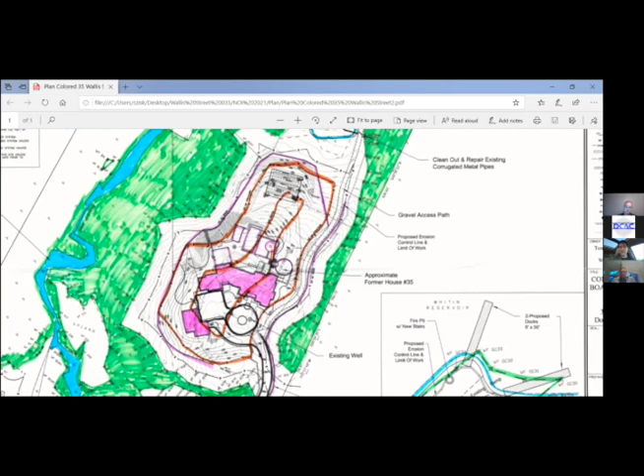In addition to the redevelopment of the house site, if you could scan the plan north toward the reservoir, there's an existing path that goes down to the water's edge where there's historically been docks. An RDA was submitted about a year ago to put in a new dock, and that was granted a negative determination of applicability along with some tree removal.

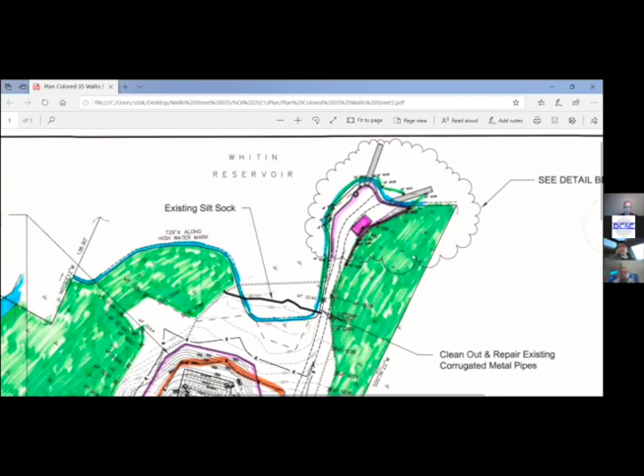The tree removal has taken place, but the docks proposed here are slightly different than what was proposed in the RDA. So we're showing those as part of this notice of intent, though in substance the commission has already dealt with this issue. We're now proposing 2 docks in slightly different locations. In addition, shown in pink is a proposed boathouse that would be installed on pilings for the storage of water-dependent equipment, elevated above the ground.

Right next to that, in that zoomed-in picture, we show this for construction purposes, though it would not be sitting on the ground and therefore not directly fill any wetlands. This plan shows 65 square feet of BVW alteration to allow upland pedestrian walking around the boathouse, with 165 square feet of wetland replication out on this peninsula, which is largely used for ingress and egress from the reservoir for recreational purposes.

So that's a broad view introduction to the project. I think we can open it up for discussion. Art Allen isn't on the call, but he's scheduled to do a site walk with us on Friday. Mark Allen, the civil design engineer, is on the call, as well as the company who would be responsible for the dock installations.

Okay, thank you very much. Steve, did you want to start? Yeah, so it's good to know, some of my concerns were whether there's any additional clearing on the property. So that's good to know, especially where the detached garage is going up in that area. That's going in an area that's already been cleared.

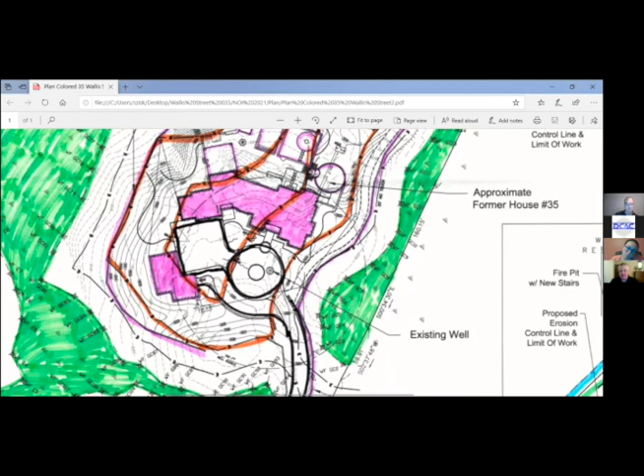So basically what we did was, in working with the architect and the landscape architect on the project, we didn't want to add any additional fill to the property. We basically used the existing elevations that were there in the past and mirrored exactly the elevations that were there before. So we're not trying to bring in any additional fill for the project by any means.

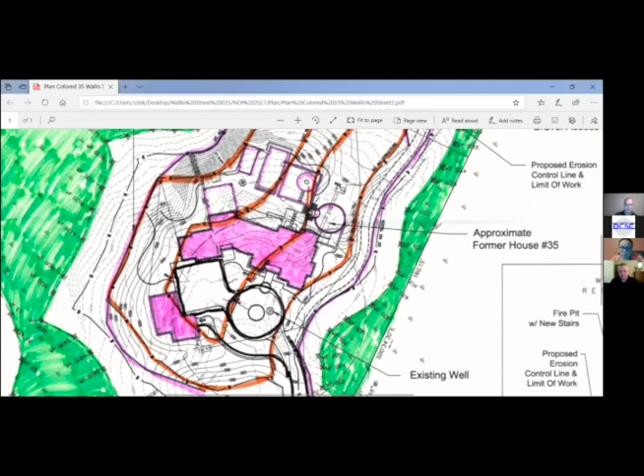So the architect is comfortable with leaving the elevations where they were for the house and the foundation. And then as you can see, the patio sort of drops off from that area, and the septic system sort of drops off from that area too. It's all going to be a natural grade transition from the house down to the reservoir.

And then this existing path that they cleared with the RDA, that's not being disturbed at all? Correct. Yeah, the path that they have there today is the path that they intend to use.

And so the only comment I had really is because you called out this culvert, and it's a little ambiguous. It says clean out and repair existing corrugated metal pipes. I'm not too sure what that means by repair. Are you ripping them up and replacing?

No, I apologize, we may have been too brief on that explanation on the plan view, and we can be a little more elaborate on the plan revision. Basically we just want to be able to clean out the culverts if they get dirty. We intend to leave the ones that are there now. We're not anticipating any additional flow, but as you know, over the course of time with leaves and debris, things get clogged. Tony and Denise just want the ability to go in there and clean out those existing culverts. No remove and replace right now, just basically routine maintenance in the future.

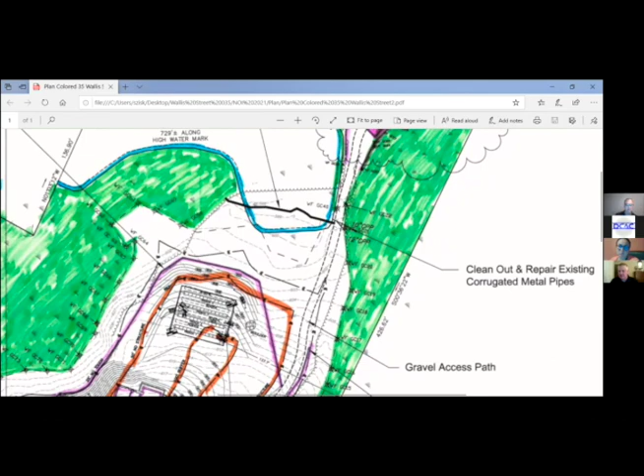Oh, that's good, yeah, it was the word repair that kind of threw me off. Gotcha, remove that word if you're not actually doing any repairing, just clean that out. And I guess that's my fault too, because with our Uxbridge store we have a river or a brook right behind it, and we have to clean that out to maintain how it flows underneath Route 16. And if you don't put the word repair in there, we get in trouble. So I thought I was being right.

Some of the other issues, I know you've got wetlands planned around here, and maybe, Mark, it's a little steep. And then everything flowing during construction, it can be a mud pit. It might be a mud pit for a period of time.

That may be something a little bit more — some BMPs, I don't know, silt fence and traditional hay bales — not for the entire area, but the areas that are prone to a little more silt and runoff heading through them. Yeah, absolutely, I agree with that, Steve.

We can definitely do that in the area of the slope just off the patio area. Yeah, in that area there, that probably has the highest chance of erosion during construction, as well as the septic system area. So yeah, I think we can bump that up and beef up the BMPs in those areas.

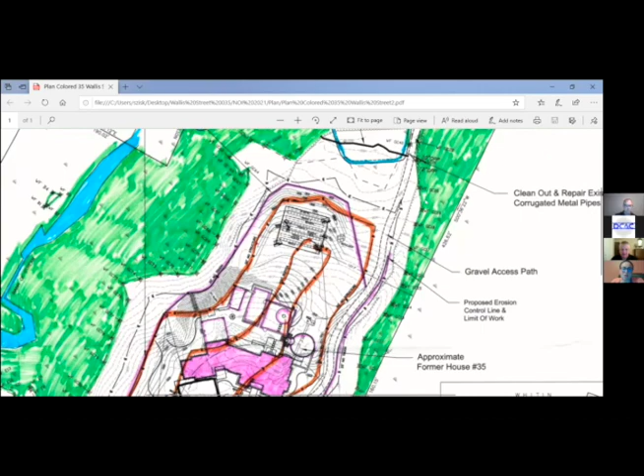It would almost be against the silt fence because it's making more disturbance within very close proximity. So either a double row or the straw bales. Yep, I don't know, absolutely. Toe it in, because everybody's saying it's creating more disturbance — you're right at the 25.

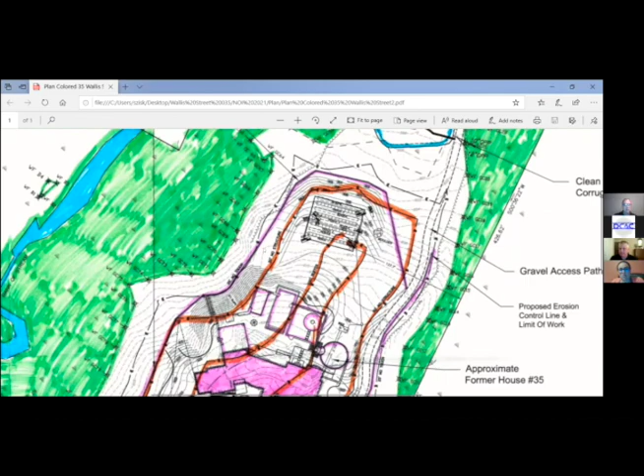What do you see, Steve? Well, I think this is part of the existing lawn, not disturbing it, just really during construction. It's not going to take much for this to channel down into the wetlands or into the pond itself. If this whole area is constructed at one time, all it takes is a heavy rainstorm, and it's such a slopey hill.

So I think what's proposed, and no fault of theirs, is just traditionally that little fiber log, the 12-inch compost sock, but even a double row or straw bales to double it up, versus using a ditch witch right on the 25 on both sides. And then there's even more chance by toeing it in. I don't know what I've been seeing. So if Mark takes a look at it, if you can suggest something that's a little more advantageous for security for the silt.

Absolutely. And then down here at the...

Well, there's two things with the docks. I'll work with the docks first. The concern, and I think DEP might have had a comment on this, is I don't think it's a great pond, but it's the issue that a lot of people would like, well, Manchaug Pond, they have to get Chapter 91 licenses and stuff. I don't think that's the case. There might have been a determination, but it's the length of the pond, especially the dock, that I don't know. We really haven't come into a situation where we've had 30-foot docks that project out into the lake. I don't know whose jurisdiction that would be, but that'd be something you might want to look at.

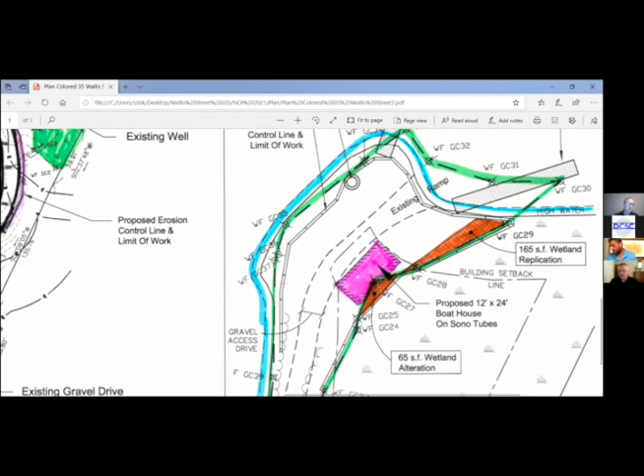Okay, and then the boathouse. It's an unusual situation, we haven't come across this too often. There wasn't really much detail exactly. I know you're on sonotubes, but 12 by 24, is it going to be like a canopy type? Is it enclosed? Is it going to be like a glorified shed where people hang out, what's the purpose of what's going to be inside of it?

Yep, absolutely. And apologies for the short explanation on the plan, but like Scott mentioned earlier in the narrative, it's going to basically just house the water activities, their life jackets, their boat equipment, and it's not meant to be anything that has plumbing. It's going to be sitting on helical piles, not sonotubes actually. That's one of our changes to the plans. Heliopiles are a little bit less invasive to the ground. They're a steel cylinder that corkscrews down into the earth just a couple of feet, and then the structure sits on top of those heliopiles.

So we initially spec'd out sonotubes, which have a little bit more earthwork with the digging, excavation, and concrete. But we're actually going to put them on heliopiles instead. It'll be a wood structure. It'll have a roof over it, doors on it, a lock on it. And it's mainly for storage of boating equipment.

So no fuel or anything? I'd have to ask Tony and Denise that. No. No fuel. I have a quick question. So no fuel.

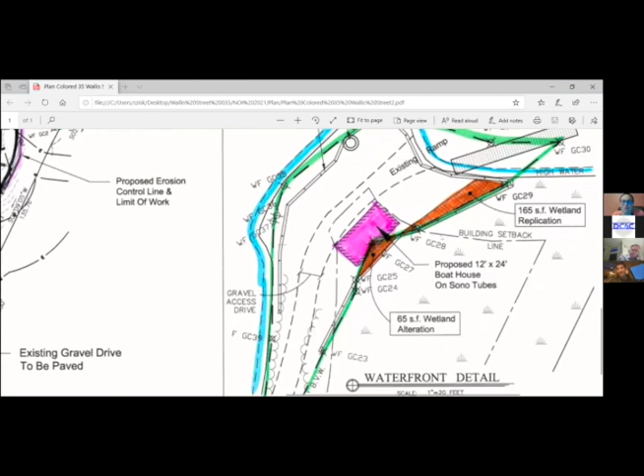At that projection, is there a reason why that flag is jutting out? I can't quite remember, do you think you would not be able to qualify for the 500 foot fill without doing replication with that point there? Are you suggesting that maybe we could qualify that as the 500 square foot finger-like projection? Yeah, that's something we could take a look at, because there's a lot of wetland already, and the replication is so small, and I don't know the survival rate of our replication as it is. Yeah, I think your point is reasonable, and it would be disruptive to build that replication area for very little return. So yeah, that's something we can take a look at for sure.

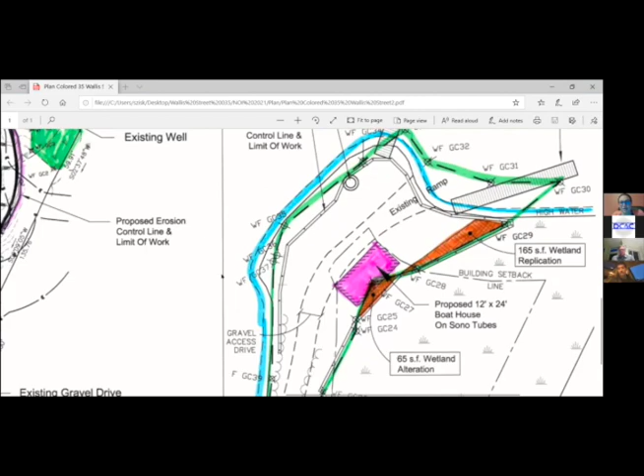Okay, I just don't know why it's at a point. I didn't notice when we were out there initially. It's fairly gradual. Okay.

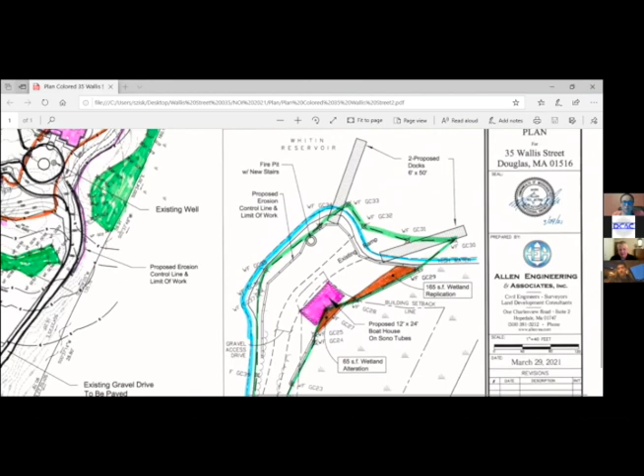So Steve, did you have any other questions about this area of the lot? Well, it looks like they're right up against the building setback line. I would make sure you talk to the zoning officer and the building inspector to make sure, I'm not sure if this is surveyed in, you don't want to be unsure how accurate it is. And is there any reason why you can't pull everything outside of the wetlands?

Yeah, Steve, great questions. The answer is, this was all surveyed in, all the building setback lines are based on the ground survey of the existing site infrastructure. So the existing ramp and existing path are shown there in dashed lines. Basically what I was doing and Scott was doing, we were being conservative, because in typical situations when you place a building there are people moving around building this structure. So we basically just clipped that point and said 65 square feet of wetland alteration, albeit possibly temporary and underneath the building. We wanted to be a little on the conservative side, since it's going to be some work to build that structure and get it down there.

But we fully intend on asking the building inspector for a permit down there. We're comfortable with the size and location. We couldn't move it any closer. We didn't want to move it further in, closer to the wetland, and we didn't want to encroach upon the existing path down to the ramp.

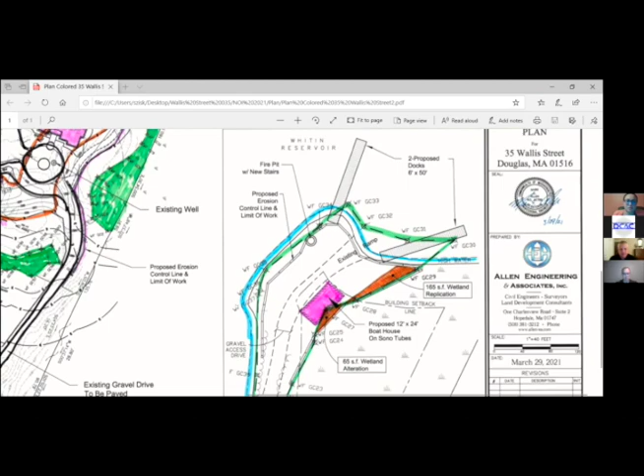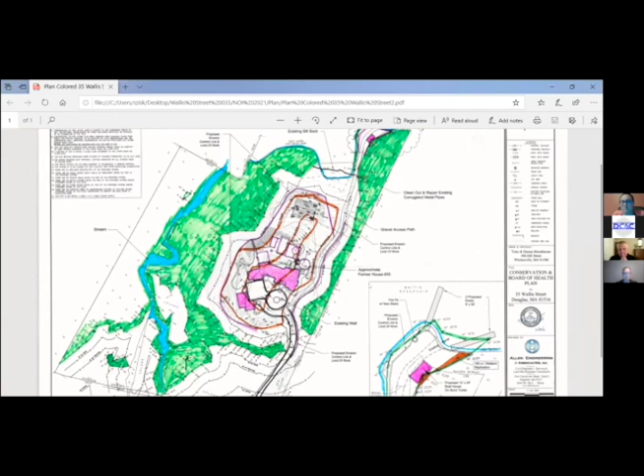So we don't have any... obviously it's 0 on one side, so the whole entire thing is 100% within the 25 to 0, would you say? Correct, and it's currently cleared at the current location. It's not that we're not going to be taking down any trees. Put that in so the board is clear on what we're authorizing.

Okay, Katie, Grace? Yeah, I had definitely shared those concerns as well on the structure that is within, it's on top of a piece of wetland, whether or not that structure could be moved or resized. I'm not so against the idea of a wetland replication, I think they can work, but I also took issue with the location there at the point. I don't know that it stands a chance for survival as a replicated wetland in that location, right on the water.

If there were to be a replication area, I would rather see it further up, away from the water - maybe closer to the walkway if there was a replication. But at that point you're not replicating the same wetland because it's in a different location. Obviously the ideal scenario would be moving the boathouse so that it's not impacting the wetlands at all.

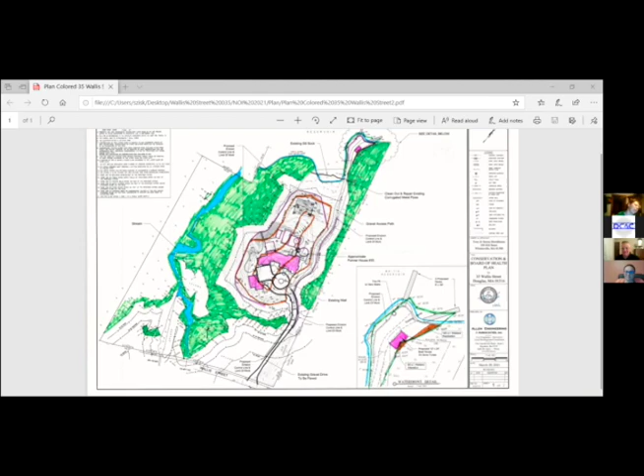And then just some clarification, because I've seen the site and it had the kind of wraparound driveway. Is the driveway... I'm looking at the black lines here. Is the driveway a loop? Is it inside? How much of this is paved? Gotcha, so yeah, it's a little bit - I don't know who did the architectural rendition, but it's a little bit obscure. The exterior black line closest to the guest house is a landscape line.

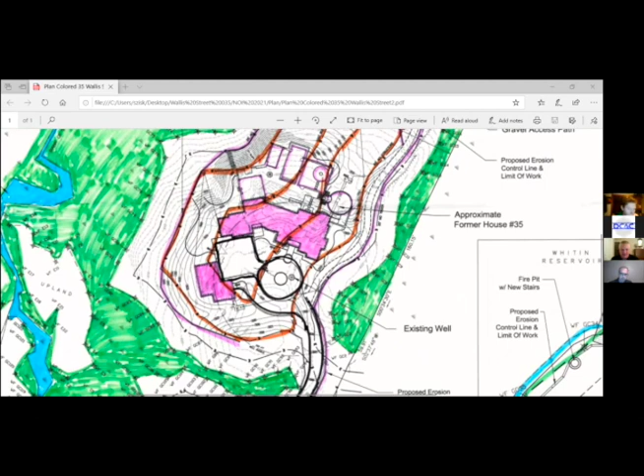Yeah, that's a landscape line. So the internal line to that will be the pavement. Yep, that's the pavement, my bad, sorry. Okay, that's okay Steve, no, that's fine. So then the driveway - I need better clarification - goes up to that circle? Yes. The whole circle is paved? Correct. No, the very interior of that circle will be a landscape area.

Yep, okay, so this is the driveway here. The well is under the driveway? Correct. Yeah, so the existing well we have chosen to keep. I think that might have been one of the comments from Steve earlier. We plan on keeping that existing well, it had quality and quantity. We'll show the extension from that line to the new house. The line was there to the old house.

What we're going to do is simply add a steel frame and cover to that well so that we can keep it. Sir, I have a question - why do we keep the existing well?

I'm sorry, who's speaking? We're in the middle of the presentation. You'll have to wait till we open it up for comment. Oh, sorry, my bad.

Mark, what is this here? Is this just lawn? No, that will be paved, that'll be driveway. Correct. Also, you've got bays here, bays here, and then bays. Correct.

Cable, we've got an issue here. One second, guys, trying to remove them. I'm doing as best as I can.

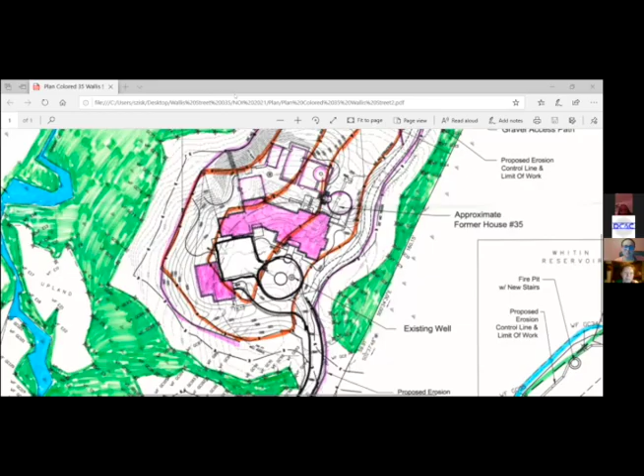This is awesome, we may need to shut down everyone, but we'll come back on. I think we're looking good. No, we're not, I'm trying. They're coming in as fast as I can get them out. I'm doing it as well. We gotta shut it down. Let's- okay, I'll shut it down. All right, we'll be right back.

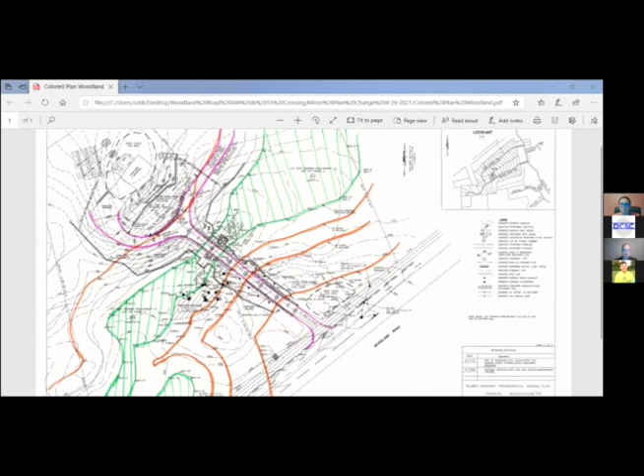So Dave, I can let you run and explain your new rendering here. Good evening. So what we did, very simply, is we reduced the driveway width.

From 18 feet to 12 feet. The right-hand side of the driveway is exactly the same as it was previously. We moved the left side in 6 feet. The culvert length is right in the middle, was 27 feet, is now 21 feet, so bottom of wall to bottom of wall is 21 feet. Limit of work is exactly the same as it was previously. The proposed utilities are now outside the proposed driveway, just to the left of the wall.